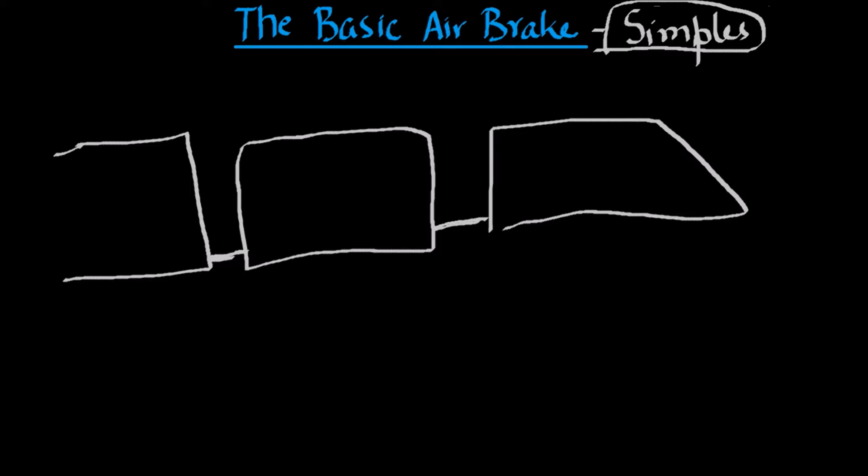We will now try and see what a simple basic air brake system looks like. In a train, we have a locomotive. The locomotive is connected to a number of trailing cars. These cars can be either wagons or coaches. The locomotives and the cars amongst themselves are connected through mechanical linkages called couplings.

However, couplings are not the only connections among the cars and the locomotive. There is a brake pipe which runs along the underfloor of each car. These brake pipes are connected between the cars and from the end car to the locomotive through rubber hoses. This is a rubber hose, and since this is connected in the brake pipe, this is called a BP hose.

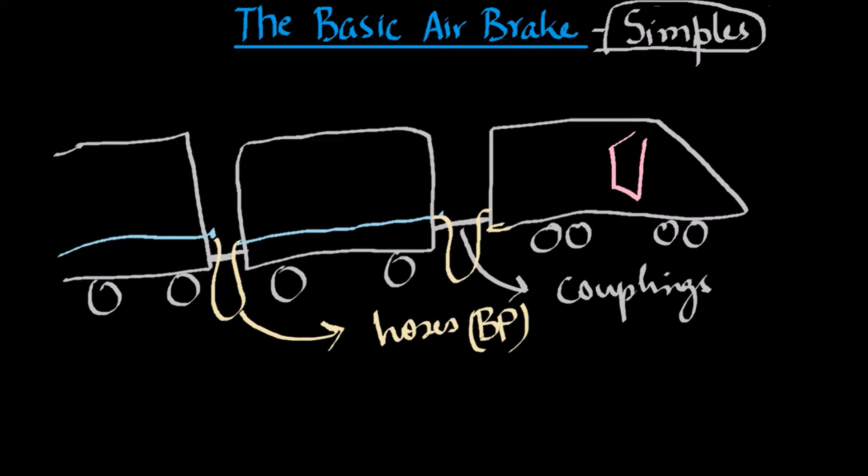There is a compressor in the locomotive. This compressor takes in atmospheric air, compresses it, and fills a main reservoir. The main reservoir supplies this compressed air to the brake pipe. However, this is done through brake valves, and one of these brake valves is the A9 brake valve. This is also known as the automatic brake valve.

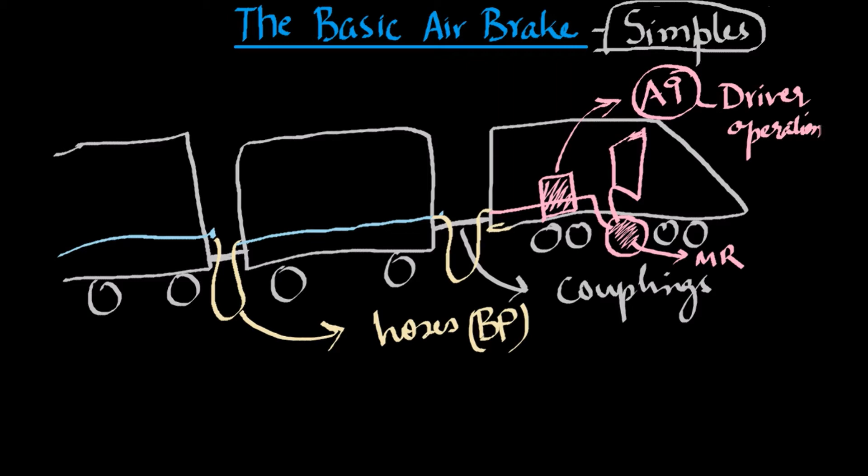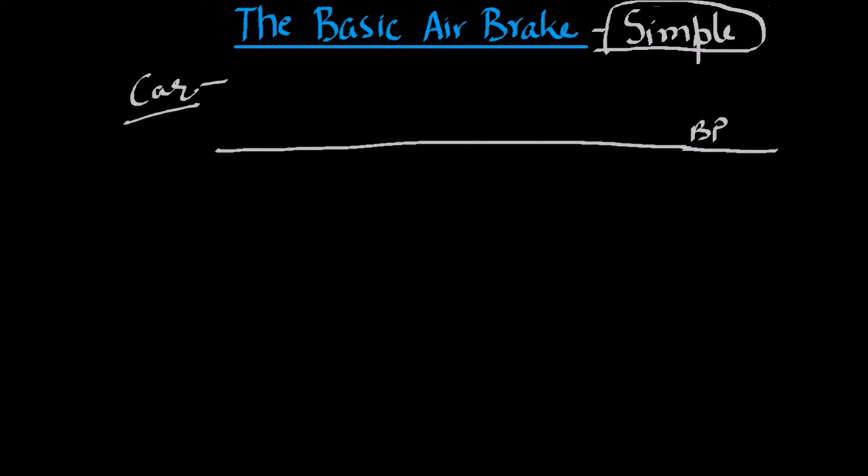When the driver wants to operate the brakes of the train, which means when the driver wants to apply or release the brakes, he controls the A9. Under the floor of the car, we have the brake pipe. This brake pipe is connected to a triple valve, also called the distributor valve. Remember, the brake pipe is already at a raised pressure.

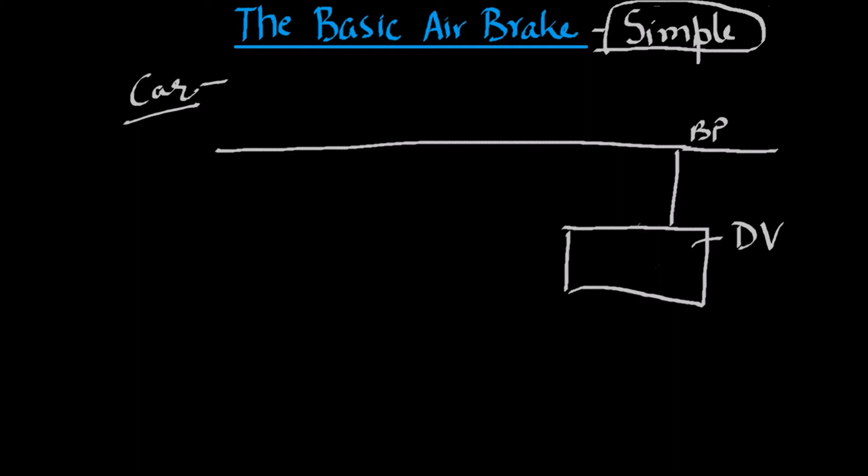The DV or the distributor valve has a few other connections. There is an auxiliary reservoir which is a cylinder of air connected to the DV. The DV is also connected to a piston cylinder arrangement which is called the brake cylinder. The piston in the brake cylinder is backed with a spring for return force. The piston on the other end is connected to the brake blocks. There is another port on the DV which exhausts to the atmosphere.

As soon as the driver wants to apply the brakes, he reduces the pressure in the BP by applying the A9. This reduces the pressure in the BP. When the A9 is not applied, the AR and the BP are at the same pressure, basically because the AR in such a case is always connected to the BP. As soon as the A9 is applied, the pressure in BP reduces.

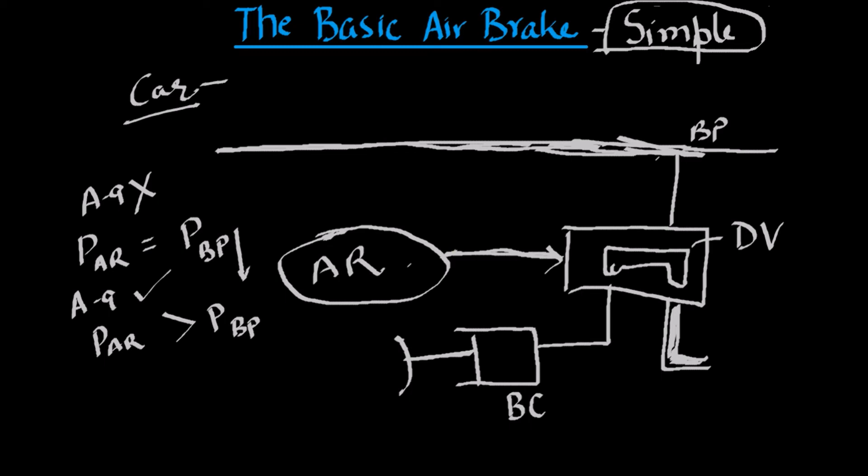The DV keeps on comparing the pressures in the AR and the BP. As soon as the BP pressure falls, a slider mechanism in the DV operates, basically pushed by the AR pressure which is now in excess from the BP pressure. This causes the AR to get connected to the brake cylinder or the BC. This causes the piston in the BC to be pushed outwards, causing the brake blocks connected to the piston through certain linkages to clasp the wheels.

This causes increased frictional force between the brake blocks and the wheel tread. This reduces the speed of the train. The brakes are now in the applied condition. Till the BP is in reduced condition, the AR will keep on supplying air to the BC.

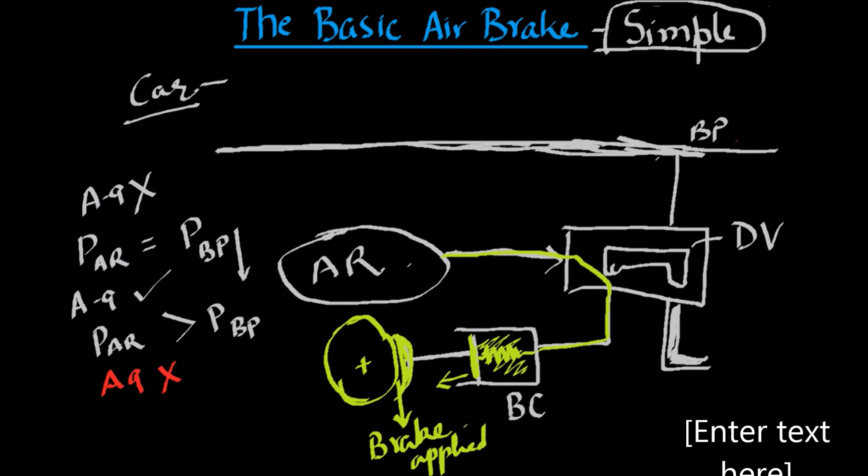Now when the driver wants to release the brakes, the A9 is now brought to the release position. In this case the BP pressure rises. A raised BP pressure will cause the slider to move back, and the BP and the AR are then connected. The AR pressure that would have reduced by supplying air to the BC now gets charged from the air coming from the BP.

At the same time, this movement of the slider inside the DV causes the BC air to now vent out through the exhaust port of the DV. The spring mechanism inside the piston causes the piston to be pulled back into the BC, releasing the clasp on the wheels. This releases the brakes.